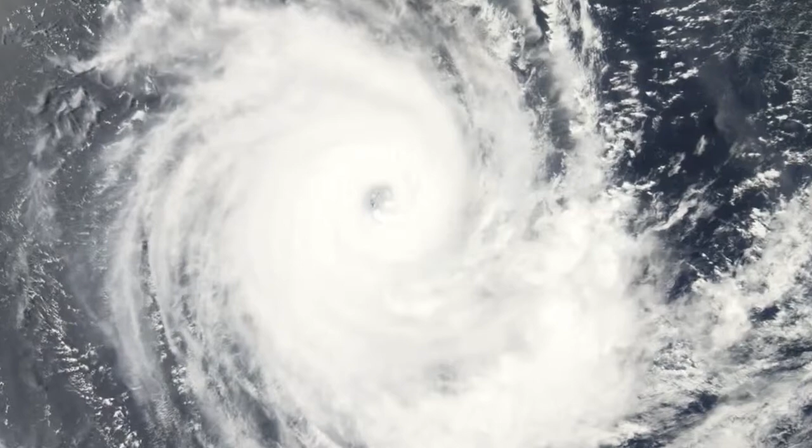Wave power is something which has challenged engineers and scientists for well over a couple of hundred years, dealing with the environment, dealing with the extremes of storm waves, the extreme amount of power that you can get in storms. To give you an idea, the power in the sea during a storm is something like 1,000 times greater than it is during your normal operating conditions.

We've been working on something called the AWS 3, which is a large-scale machine which uses rubber membranes to capture the power of the waves. These machines will be utility scale, so 2.5 megawatts each, which is significantly larger than what anybody else is working on.

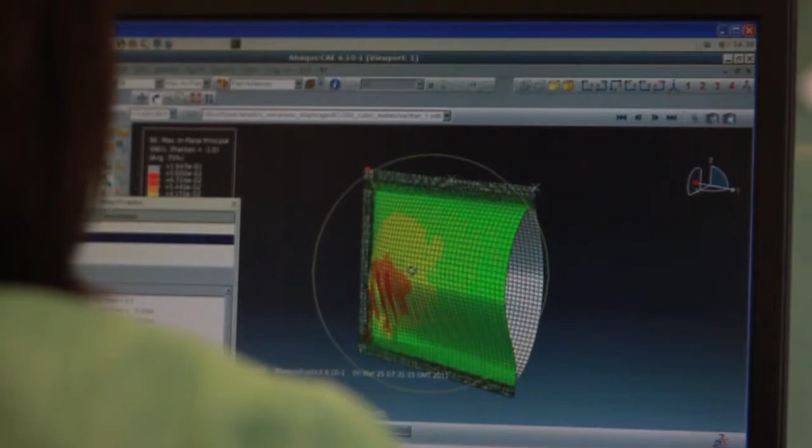Over the years we've developed a reputation for telling it like it is. The result of that is that we've got very significant interest from utilities. They know that when they talk to AWS they can believe what we say.

Talking to a mutual acquaintance, a very experienced engineer, about the lack of engineers with a really good practical sense of engineering and the ability to innovate, he suggested that I get in touch with 4C. We engaged 4C to do an initial piece of work, and that was extremely impressive.

In a way, it's the courage to throw the rule book out and say, yeah, we're just going to get a whole bunch of interesting people in here who might have some relevance to this problem we're looking at. We're not going to make sure that every single one's a chartered engineer and dyed in the wool with 20 years of experience. We're just going to get people in who might add something. And that takes a bit of courage, and it is very refreshing.

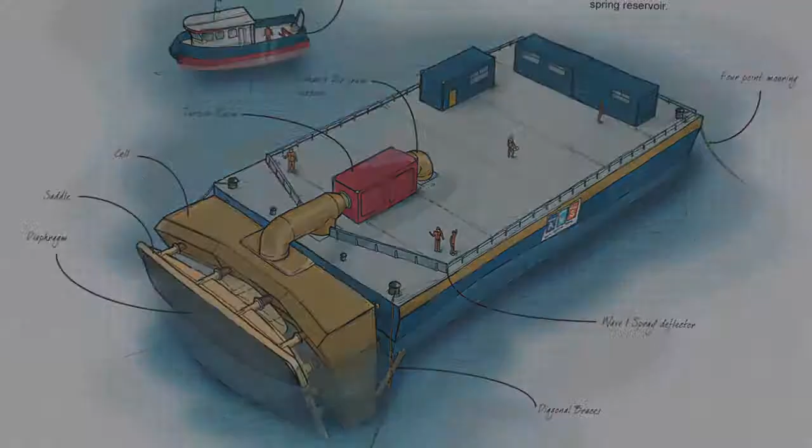So the tank testing we've done recently is essentially a model test of what we call our full-scale single-cell test. We want to test one single cell from the full-scale machine, and it's coupled to a barge.

4C were involved with the design and development of that entire test concept, and then we went to the tank to validate the concept, validate the barge design, the cell design, and so on and so forth.

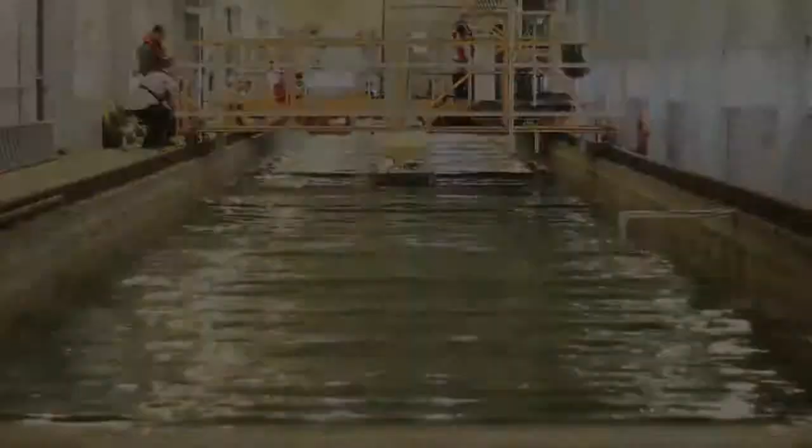4C also helped with the specific design and development of the absorber, or the diaphragm, on the front of the cells. The results have been massively useful.

I guess we almost didn't really know in detail how the barge was going to respond when we have the cell in front of it, so we've been able to measure the motions, the airflow, the diaphragm motion, so in a range of sea states we now understand how the full-scale system is going to respond.

The more time we spent with 4C, we understand how they work, they understand how we work, and it's developed quite a good relationship, I think.

We can trust them to do jobs and they can go away and come back with the answer, as opposed to needing lots of input and real specific focus on tasks all the time. We can give them an open remit and they come back with good answers.

The way that we create value is to develop new technology to the point where it can be commercialized. Or you just go to traditional engineers and they spend a lot of time doing detailed design on something that will never work.

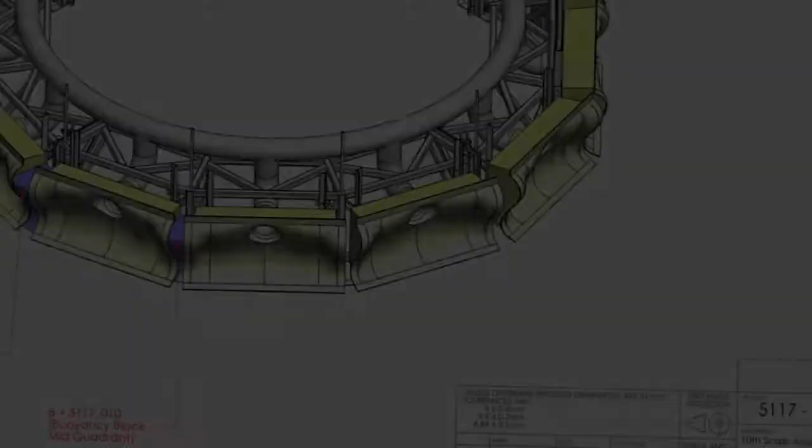Our experience with 4C really was quite different, in that every time we went to them with a problem, we actually got something back which we felt we could use, something which added to the core value of our business. If we just look on a competitive basis, there really are not many companies like 4C which can provide that sort of service, so it's kind of difficult to measure them against anything else.

I think from our point of view, we know that they price fairly, they charge for the work they do, they don't charge for other things, there's not a lot of hidden overhead, there's not a lot of admin cost, and the result is that not only are they good value for money, they're also affordable.

They're professional, definitely professional, unconventional, but reliable. But overall they're just cool.